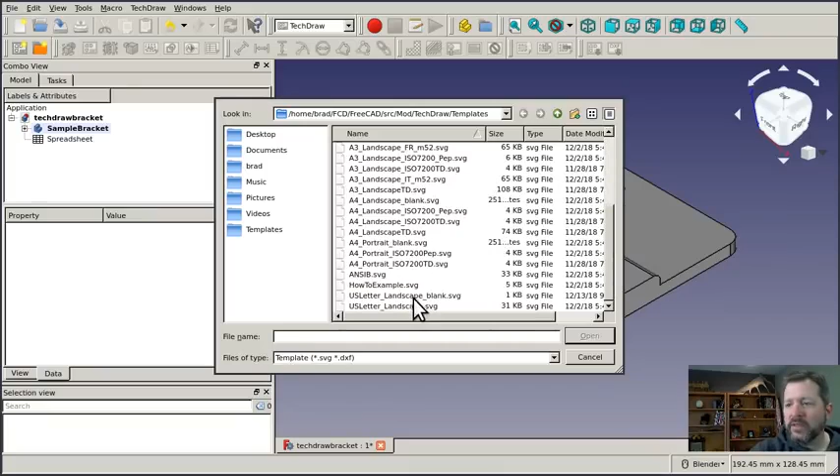And when I select that, it opens up a new MDI window at the bottom with the page. It adds a new node to the tree for the page, and it also enables a few new tools on the toolbar. Looking at the page node and opening it up, there's a template node underneath it.

If you look at the template node properties on the data side, you'll see that it has the width and height properties, but these are grayed out. This is actually coming directly from the template itself. The template corresponds to the actual page that's going to get printed out, like the physical piece of paper.

And it's really important that you use the correct template for the printer that you're going to print out on. For instance, A4 is very close to US letter, but not exactly. So if I used the A4 template and then tried to print it out on my printer on US letter paper, my printer driver would rescale it to fit, and my drawings would actually have the incorrect scale. It would stretch and squash it in order to fit on the page, and I wouldn't get an accurate representation of it. So you definitely want to use a template that's specifically for the size paper you're going to print out on.

If I have a drawing in process and I make the mistake, I can still switch the template after the fact. There's a template property right here on that template node, and it's got a pick button, and I can go right back in and choose a different template if I wanted to. Choosing the A4 template brings in one that has the margin markers and the data block, and I can switch back again, and I'm going to stick with that US letter landscape blank for right now.

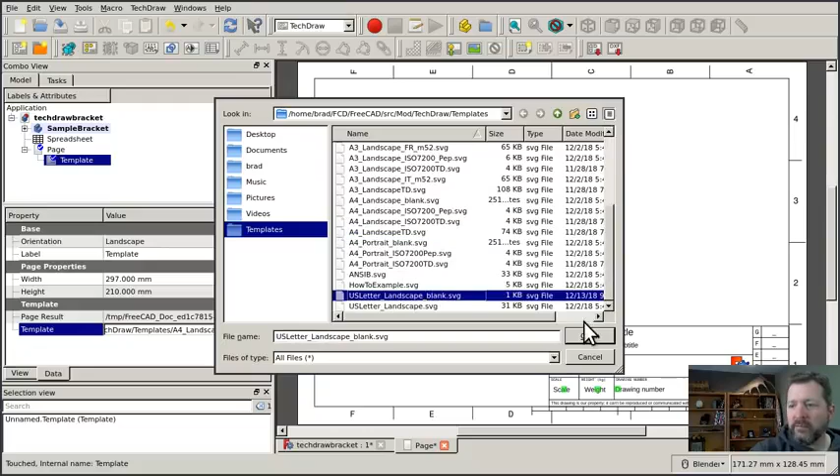Templates themselves are useless. What you need is a view of your part, and we're going to start inserting views into this blank page. Switch over to your drawing and set the view to top view, so we're looking straight down along the Z-axis. Then switch back to the page, make sure the part is selected in the tree, and click insert view in the page, and you'll get the view inserted right here with a dotted line indicating the boundaries of the view.

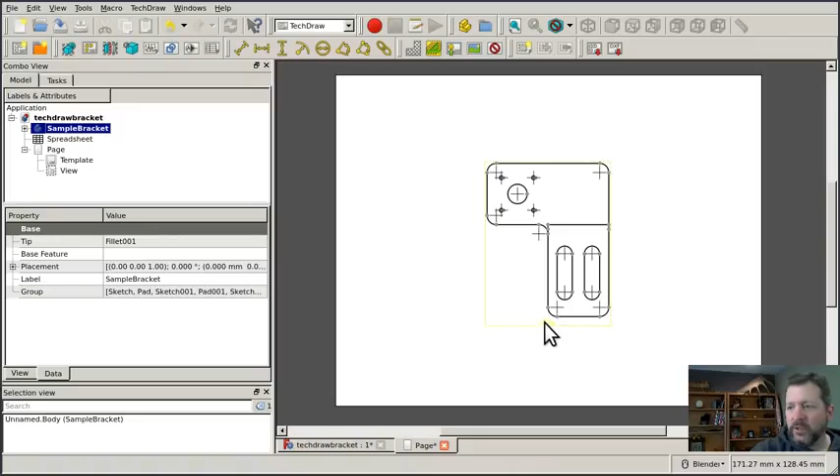I believe it gets inserted directly into the middle of the page. You can then click on this boundary and move it around as you wish to position it anywhere on the page.

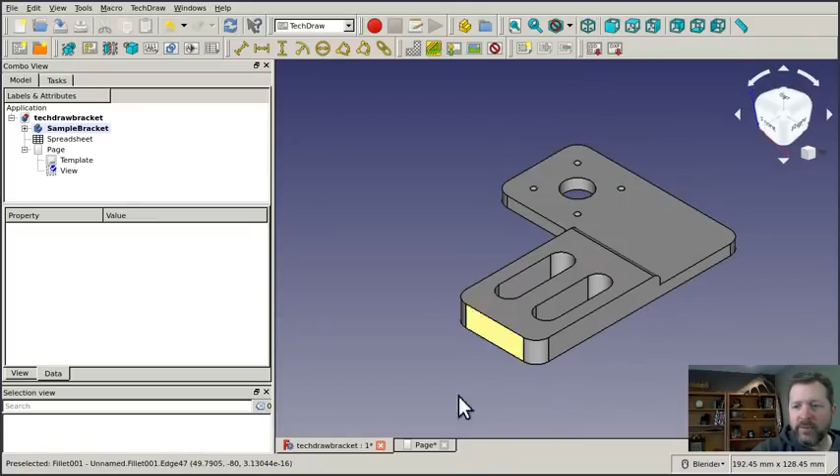Now, the view that came in takes its perspective from the view we had here. So if I set the view this way, looking at my part from an angle, and do the same thing—selecting the part in the tree and clicking the button—you'll see that the view I get is from that perspective.

You can adjust that after the fact, but it's really easier to just set your view the way that you want it, and then insert it from there.

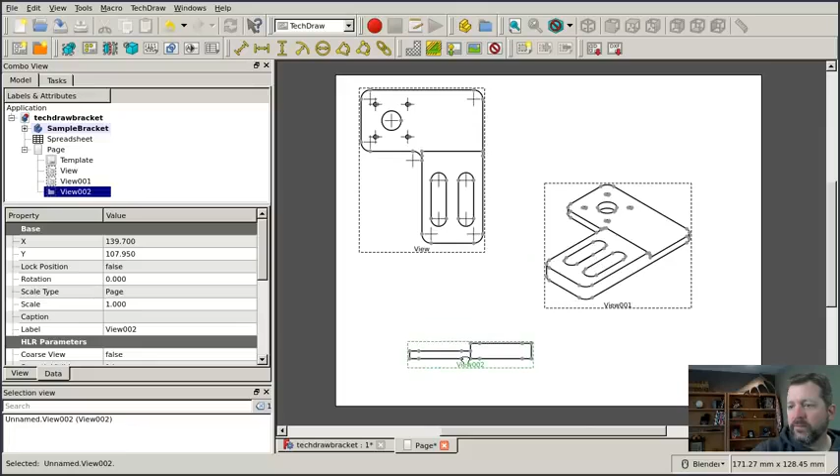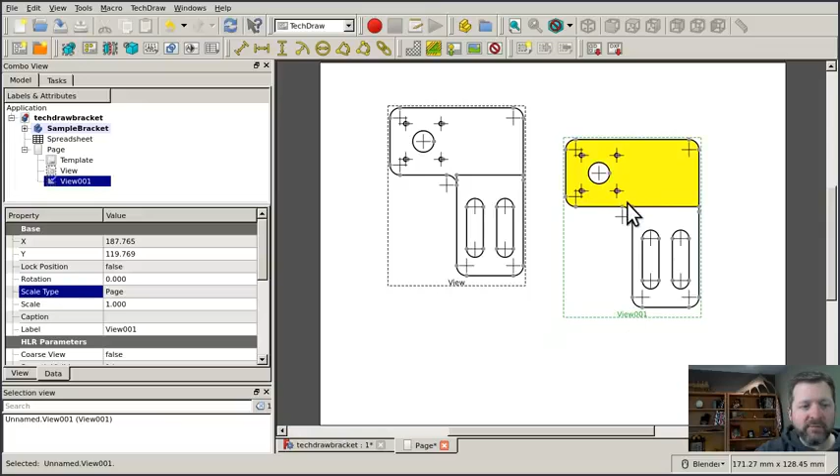Now there is a bit of an exception to what I just said. Besides aligning your view this way, instead of selecting the whole part, you can select a face. For instance, if I select this face here, switch to my page, and insert the view, you'll see that it directly aligns along the normal of that face rather than aligning to the view of the camera. So that's a bit of a shortcut—if you know what you want, you can do it that way.

Part views are not the only thing that you can insert into a TechDraw page. You have a number of other options here on the toolbar.

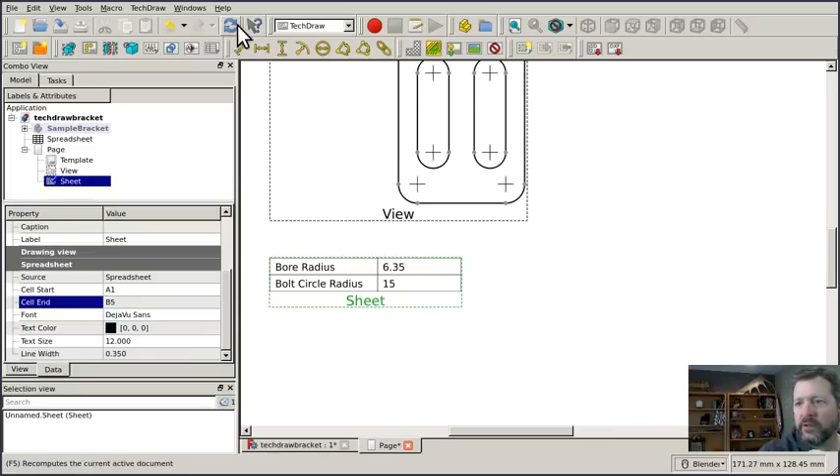One of these is a spreadsheet, and I've already got a spreadsheet controlling some of the dimensions of my part. If I select the spreadsheet in the tree and click that button, I'll get what looks like a view, and it has properties as well. The cell start and end properties control the corners of the box—I think it goes from A1 to B5—and when I refresh the page, it will adjust to show me all of those cells in that view.

Objects created in the draft workbench are already 2D, and they can be inserted into a TechDraw page using this icon here. For instance, I have a shape string object that I created, and I can insert it just like a regular view and put it on the page like that.

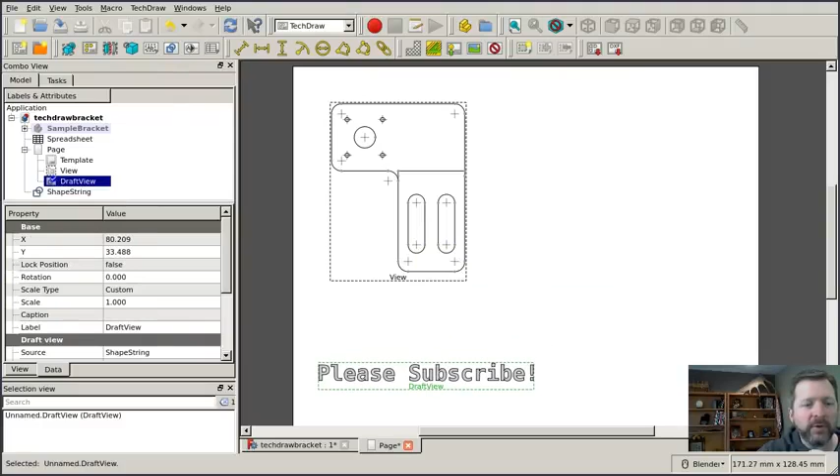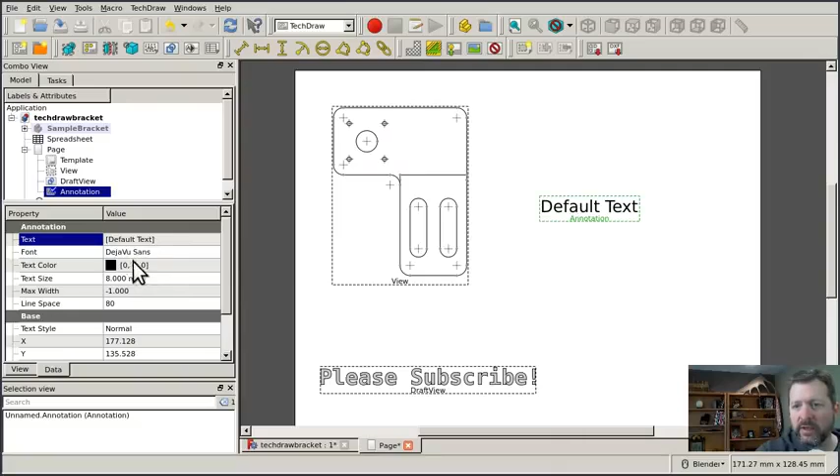If you want to insert arbitrary text into your drawing, for instance a text description of some feature, a better alternative is the annotation, created with this button here. Clicking it creates the annotation object, which can be dragged around the page and positioned like anything else. To edit the text, go to the text field on the Data tab, click the button, and it'll open the editor where you can put in anything you want. And there you've got an annotation that can be positioned like anything else.

There's also the opportunity to insert an arch section plane. This is not a tutorial on arch, so I'm not going to dive into that one, but it works exactly like the others. Assuming you already have an arch section plane created, you just select it and place it in, and it'll have a set of properties specific to a section plane. It makes it easier to create those kinds of views, but maybe when I do a tutorial series on arch, I'll dive into that.

We have two more icons on the toolbar for a section view, which is different than an arch section, and a detail view. I'm going to cover both of those in a later video so we can get into a little bit more detail on them.

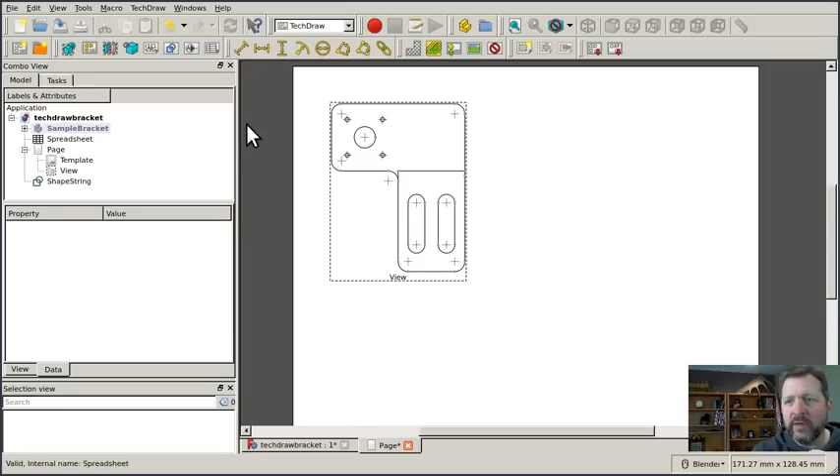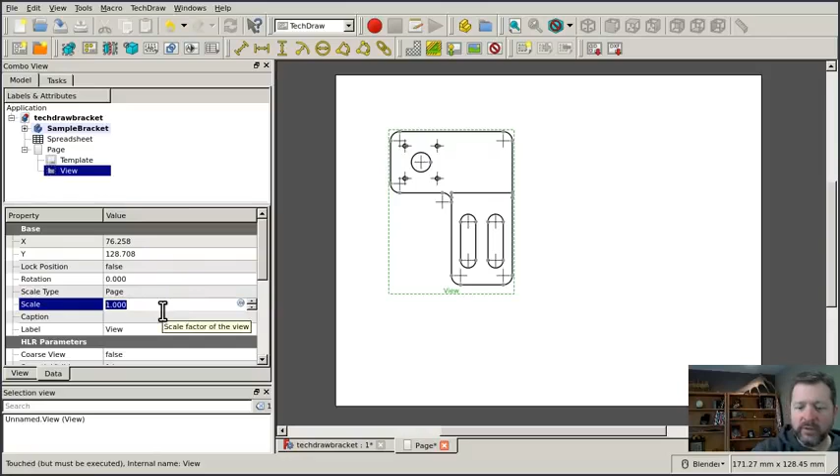The view gets inserted underneath the page along with the template, and the view has its own properties as well. For instance, I have this X and Y property, which correspond to the position established by dragging it. I also have a property here for the scale. So if I want this to be larger, I can do that, and when I refresh the drawing, the view will be scaled up to match.

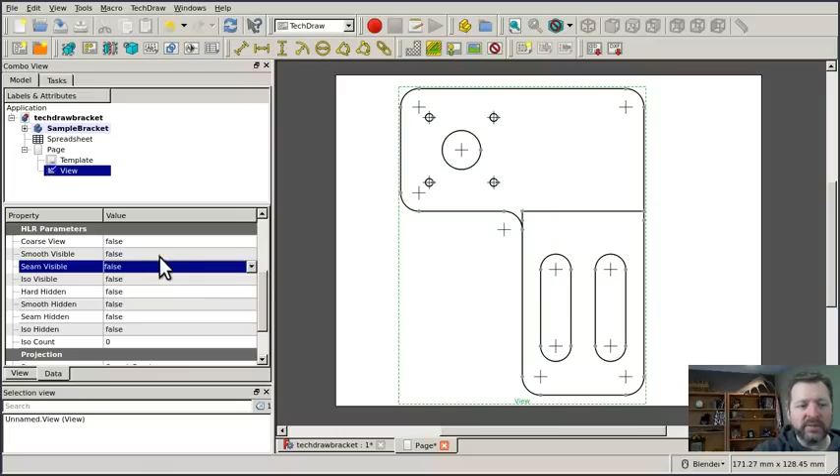You have a number of options to control what's actually seen. For instance, there may be hidden lines or interior lines that you either want to be seen or don't want to be seen, and those can be turned off and on here. For instance, a seam refers to that line around a sphere, indicates an edge that's not really there.

Now switching over to the View tab and looking at the properties there, and I know this gets a little bit confusing because we're using the word view in several different ways. We have the view of the part, and then we have the view properties of the view that we're looking at. I don't know, sometimes naming things gets really hard. Anyway, looking at the view properties in the property viewer, there's a couple things here that are probably useful to you.

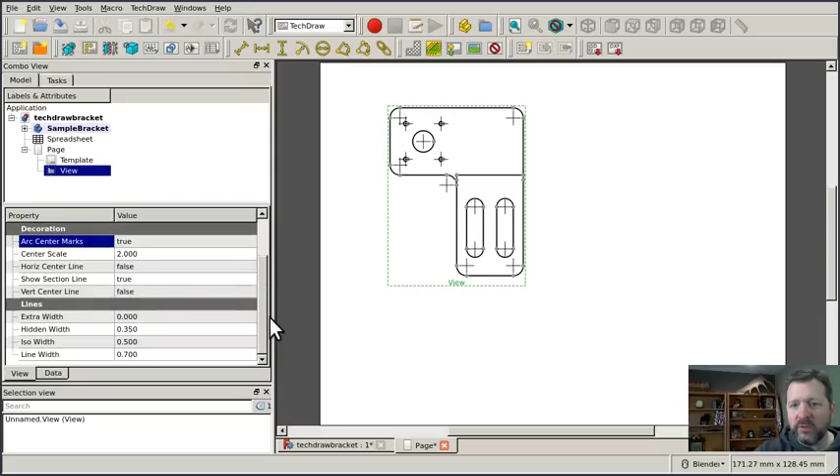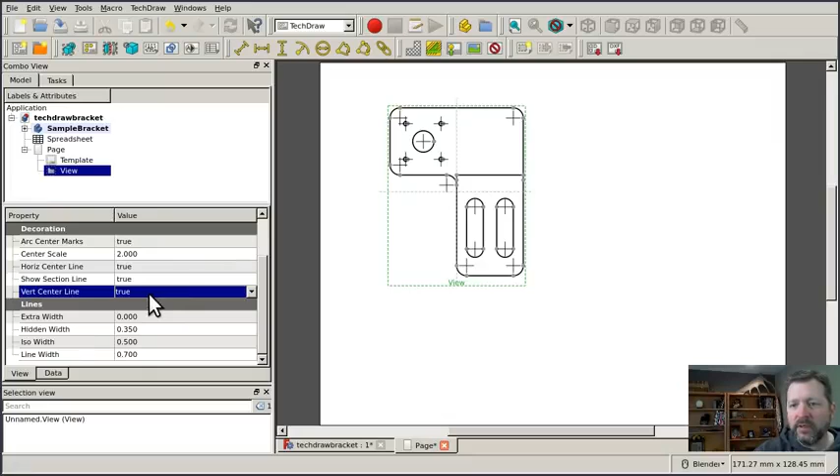One, you can turn on a horizontal line and a vertical line. If I set these to true, you'll see these sort of light gray dotted lines through the middle of the part. And this can be helpful if you want to align one view to another along the center line. These lines will print out on the output, so if you don't want them to show up on the output, you need to turn those back off again.

There's one more section of properties on the View tab that I'm going to talk about, and that's this section at the bottom, lines. The properties here control the thickness of the lines as they're printed or displayed on the paper. And for instance, line width is set to 0.7 by default, and those lines look, well, they look kind of heavy or chunky to my eyes, so I tend to run this back down to like 0.4. And it looks just a little better to my eyes.

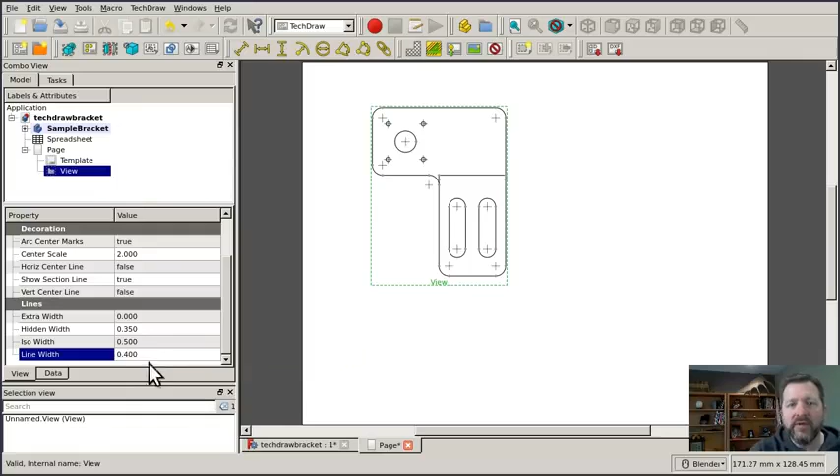Now I know that the production of technical drawings is a whole discipline unto itself, that there's a lot of standards out there for how things should be done, and TechDraw goes out of its way to comply with those standards very closely. And so adjusting these line widths, I might be violating a standard there, but I'm not always using them to produce an actual technical drawing for somebody else to read. In fact, there's one example of how you can use something like this that I think is very handy for hobbyists working in the shop.

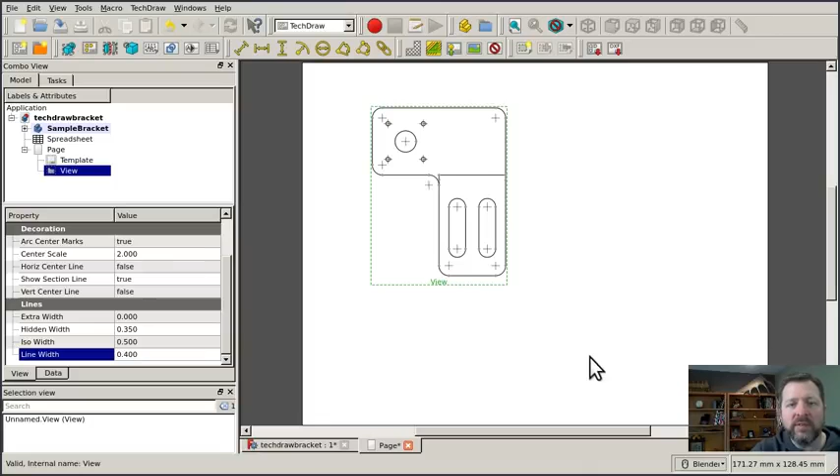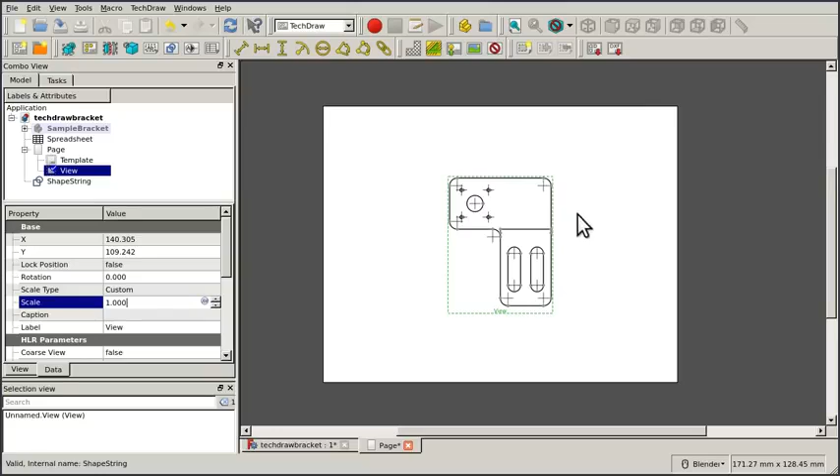Create a page using a blank template and making sure that the template size exactly matches your paper as discussed. And create a view of your part looking down on it from above. Go to the data properties and make sure that the scale is set to 1.0. That way, when the page is printed out, the scale of the view will exactly match the scale of the part. Before you do this, you probably want to go to the View tab and make sure that the line width is pretty thin, maybe around a quarter of a millimeter or so.

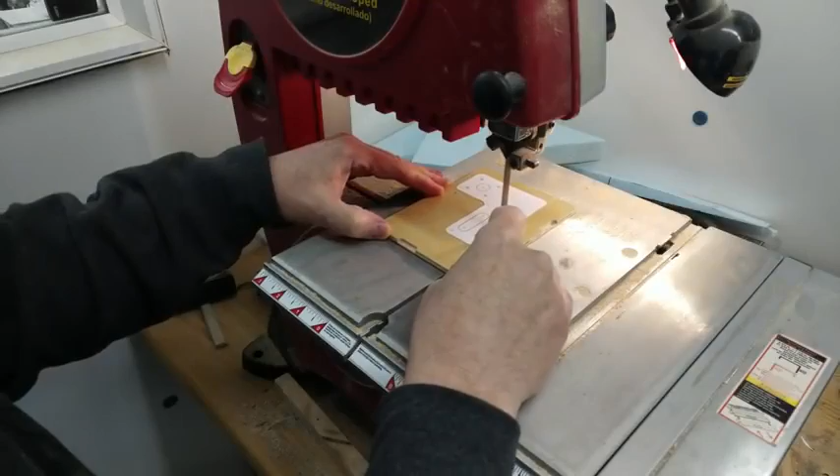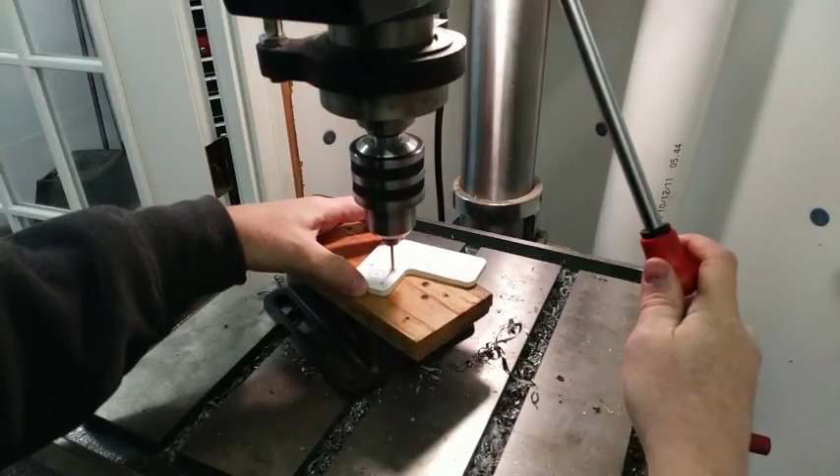Print out the page and cut out the view using a pair of scissors. This can now be glued to the face of a piece of stock to use as a cutting template and rough the part out of the material. The center points in the holes can be used as an indicator where to center punch in order to give the drill bit a place to accurately begin. You'll get much more accurate positioning of your holes than trying to do it by hand.

So one of the best things about the TechDraw workbench is that the drawings you create are linked directly to your underlying geometry. So if you go back in and modify your sketches or change your solids, the drawings will update to reflect the changes. And that's not just true for the views, but also for the spreadsheets and for the dimensions, which we're going to look at in the next video. So if you want to deep dive into dimensions, stay tuned for the next one.